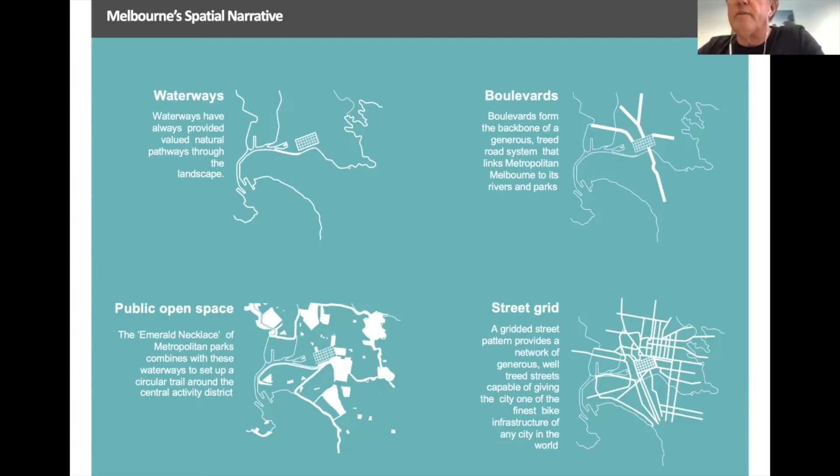So what I want to take you through is the elements that make good cities. If you're going to build on the characteristics of a city, there are five things you possibly need to do, and then methods to do that through public participation, integrated action, adaptability. If you're successful in doing these things, what you'll get is a city that's economically vital, socially cohesive, and sustainable.

So many of the things we've done, I refer back to these characteristics. I'll walk you through quickly how those characteristics were looked at in Melbourne and how we enhanced them. So the next one we'll talk about is local character.

The local character of Melbourne is made up in many ways - it's made up of the materials we use, the character we put into it, the street furniture, and things like the lanes and arcades.

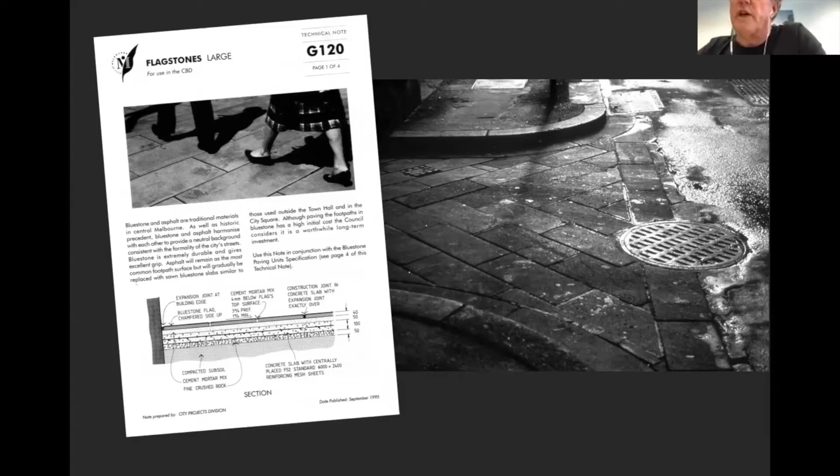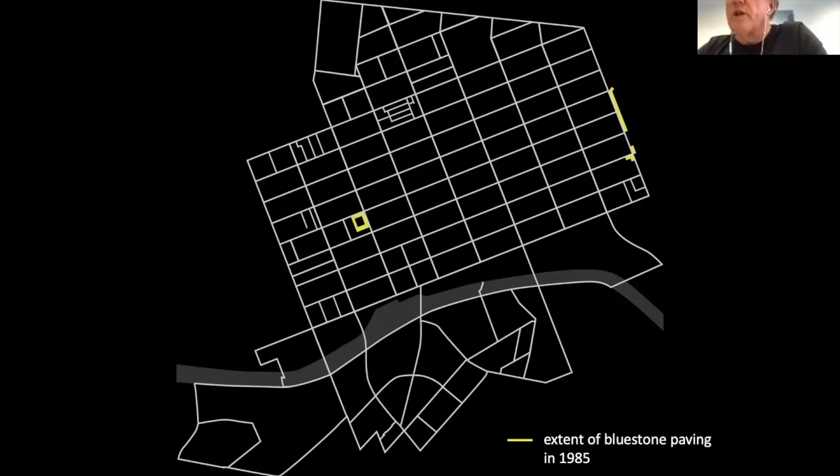What you can see coming up next is how much bluestone there was in central Melbourne in 1985 - up by Parliament, a bit around Treasury, and down the bottom by a building that had put in some bluestone paving. There was actually one other piece not on this plan, in the city square.

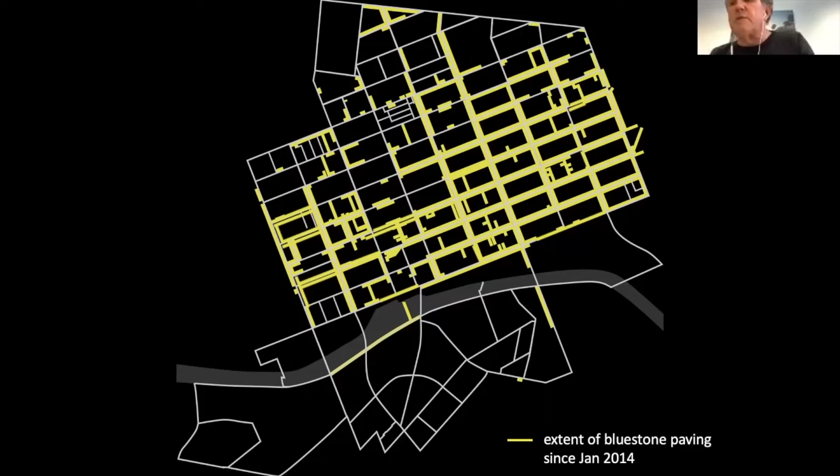What we did is, as every development went through, we required that they pave the footpaths in bluestone. You can see by 2014 most of the city was paved in bluestone, and that program continues today. If anyone was in Spring Street in the last few weeks, you'd have seen them paving footpaths that hadn't been finished. That has now become Melbourne's material - that's part of our local character, part of the way we get an identity.

What that gave us is an excellent walking surface on which we could put things like sidewalk cafes and public art - a surface that was easy to change, but then you could put things on top.

The second characteristic came out of the built form of Melbourne. When Melbourne was set up, the blocks were 200 meters by 200 meters. Hoddle came through and put 10-meter streets through, dividing the 200 by 200 meters into 100 by 200 meters. These are big blocks - if you came in the middle, you'd have to walk 100 meters one way or 100 meters the other.

So what happened in the 19th century was that people used to subdivide to make money. In subdividing, they took some of those big blocks and divided them into a number of smaller blocks, and to gain access into those blocks they created lanes and arcades.

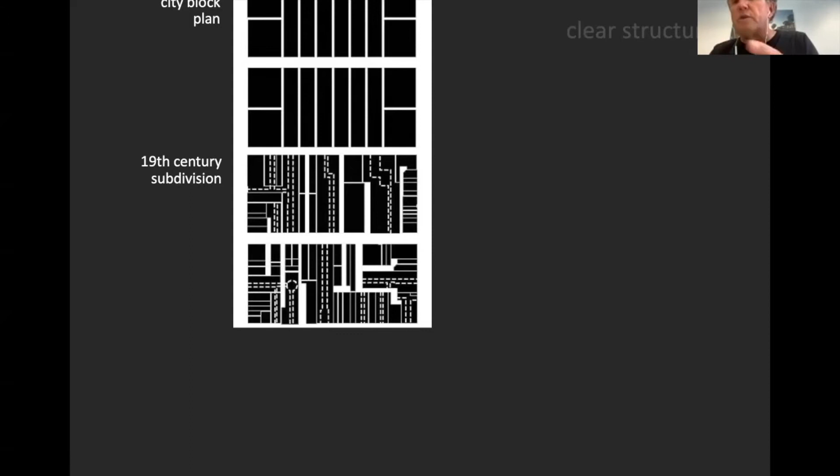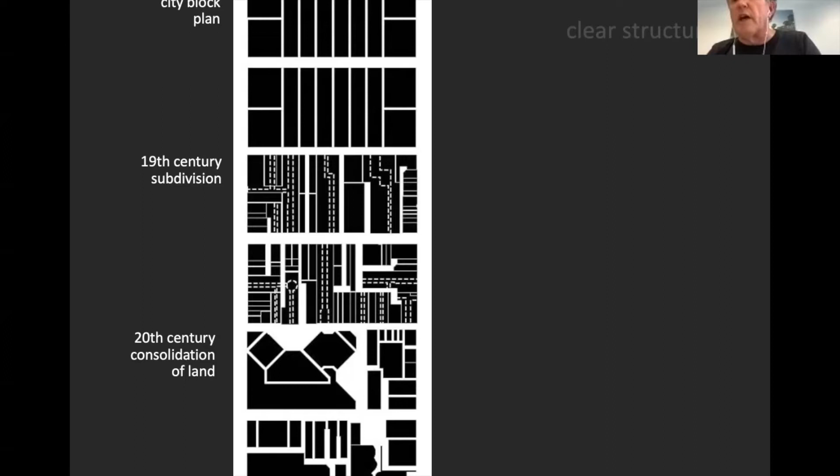You could see streets like the one on top were being turned into streets like the one in the middle - that middle one is the back of Collins Place as it was in 1985. The bottom slide is as it is today. We worked with them and slowly convinced them to externalize and put the energy back in the street. So the lanes and arcades were a very important characteristic in Melbourne.

What happened is we worked on a program to slowly turn those lanes and arcades and small streets into pedestrian areas rather than vehicle areas. This was not a difficult program. All we had to say to people was, we want to encourage you to trade onto the streets. So we gave them permits to trade onto the streets, and we started to eliminate the cars from those streets during certain hours, and sometimes completely. That's become what people now talk about as Melbourne's laneway culture, and it was built on something that already existed.

Sydney have often come to us and said, we'd love to have a laneway culture, how do we do it? And the answer is, well, you haven't got any laneways of significance, so that's going to be difficult. So cities need to build on their own character, not that of other cities.

The other important thing was density and mixed use. We knew back in 1985 that the central city was called the Central Business District, and that's what it pretty much was. People came there, worked, and then left. There was some entertainment, but if you came on a Saturday afternoon, it was deserted. So we said we need to get a residential population back, increase the density downtown, and make it into a mixed-use city.

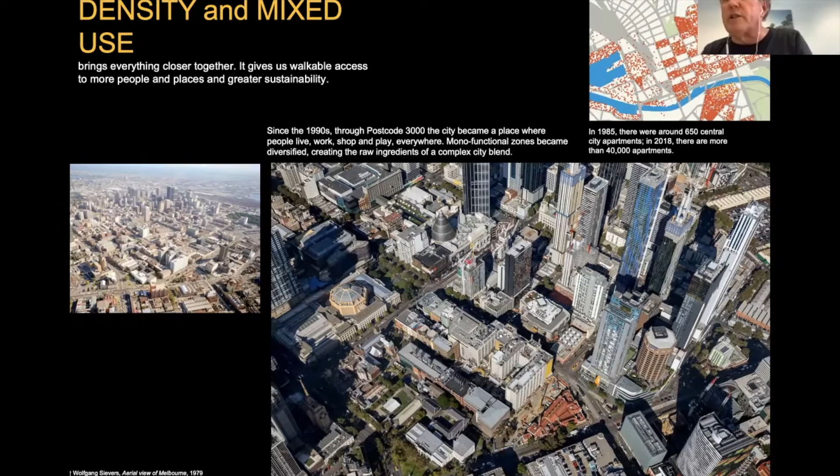The program we put in place was called Postcode 3000. We wrote it into the '85 strategy plan. We said we need 8,000 dwellings in 15 years to come into the city, and we weren't sure how we were going to do that. I often say to people, you need to have an aspirational target. You'll work out how to get there once you've convinced yourself the target's right. That was our aspirational target: 8,000 in 15 years.

What happened in the late 1980s is we had a property market crash and they overbuilt the commercial office buildings. People moved out of all the secondary stock into the primary stock, and we had empty office buildings. So we then put in place this Postcode 3000, and that saw a rapid increase in the population.

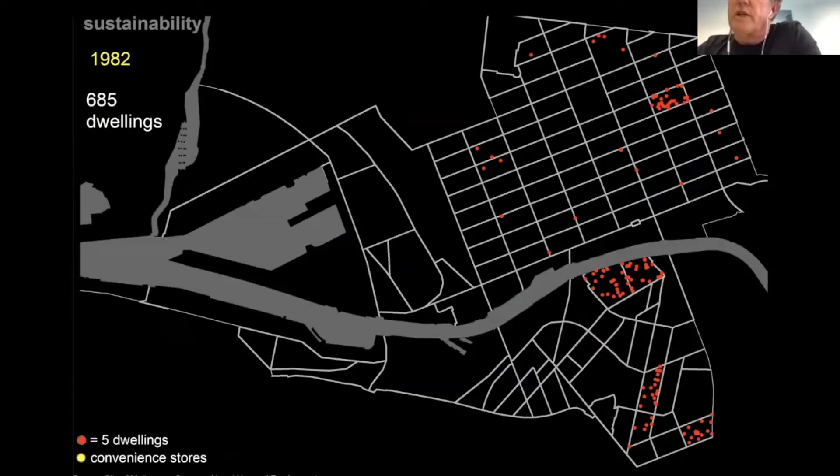Back in 1982 we had 685 dwellings in the central city - each one of those red dots is five dwellings. When the program took off, by 2002 we had 13,000. By 2016 we had 41,000. We've now got over 46,000 residential units in the central city. This completely changed the central city, it made it a mixed-use city.

What happened on the back of that is we got an increase in hospitality and retail. But with a rapid population increase like that, what you got was a need for more open space. A lot of people don't realize that central Melbourne, although we've got this ring of beautiful parks that surround it, was never designed with too many public spaces or small open spaces. In fact it was designed without those - it was thought there'd be collecting points for people, maybe from the mines, that would object, and therefore they were not there. We had five markets, but we didn't have, for instance, a City Square.

So the challenge - and I had parks and gardens in my portfolio for about eight years - when we did an open space strategy, we found that if we wanted to provide the open space for this central city, we would have to spend $700 million on buying land. Now we didn't have 700 million. So what we started in 1985 was a program I call Greener City.

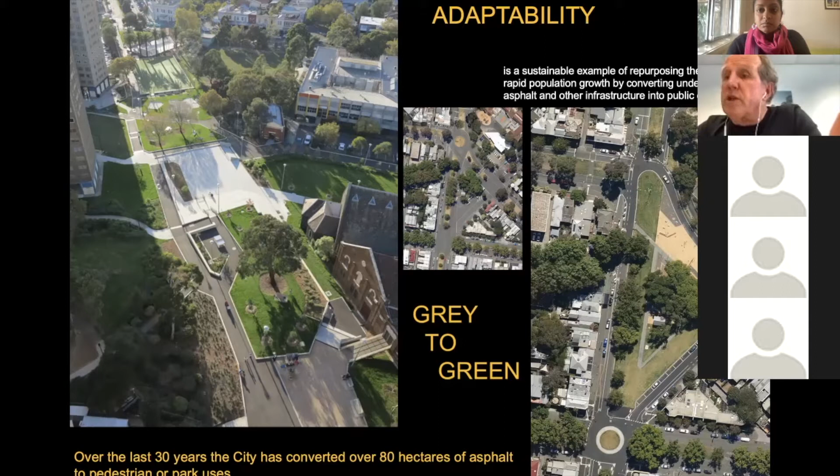This is stealing space away from the car and giving it to pedestrians and open space. You can see on the left-hand slide, at the top, Neill Street as it was, car dominated. We closed that street and designed in this active park that runs through the middle of the high density suburbs there. At the bottom, Errol Street in North Melbourne - the tiny slide in the middle - there was a 500 square meter roundabout. All we did was take away the two-way movement around that, and we took 500 meters and turned it into 5,000 meters. That saved us 14 million in land purchase price, and we created a local park.

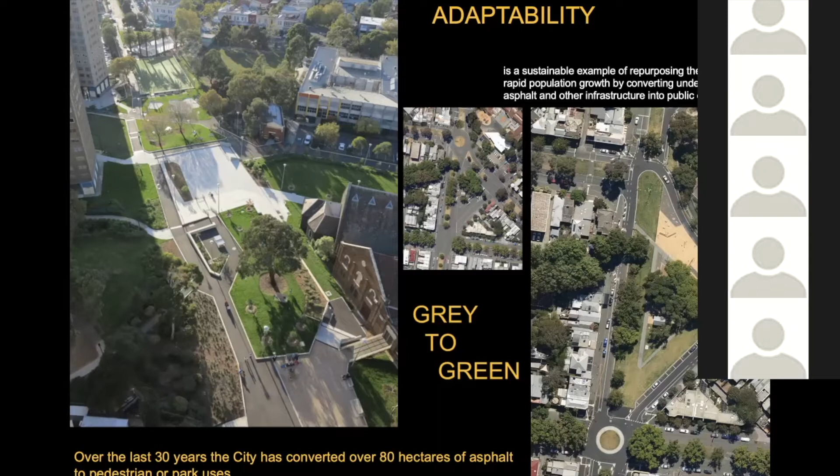Over the 30 years, we've taken 80 hectares of asphalt and other infrastructure out of the central city and turned it into widened footpaths and green space.

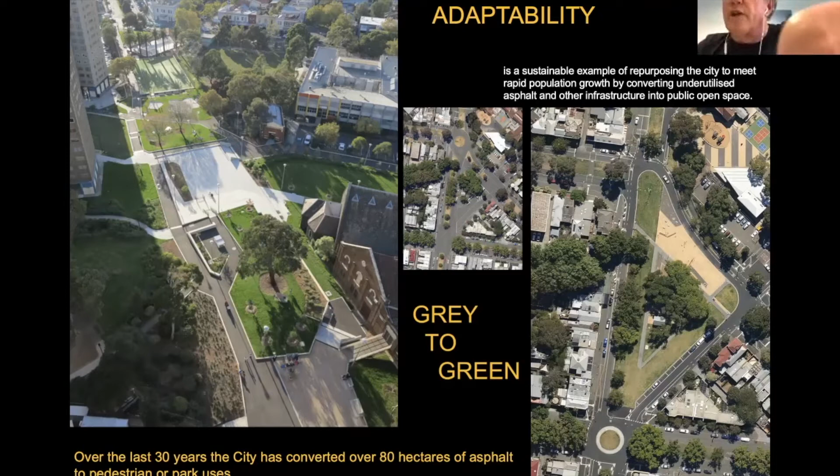What I'm trying to show is we were doing incremental action over a long period of time. The importance of that is if you say to a population, we're going to close all your streets and turn it to open space, there'll be a pushback. But if you slowly widen footpaths and take away roads incrementally over a long period, you get the success we've had in Melbourne, where we've got 80 hectares of new space for people, and a better balance. This isn't about eliminating the car, it's about getting a better balance between the car and the pedestrian.

They fall into many different types of projects, illustrated here, and I won't take you around them, but it includes putting medians down the center of roads, taking out slip lanes, widening footpaths. So there were a number of ways that we gained the space back.

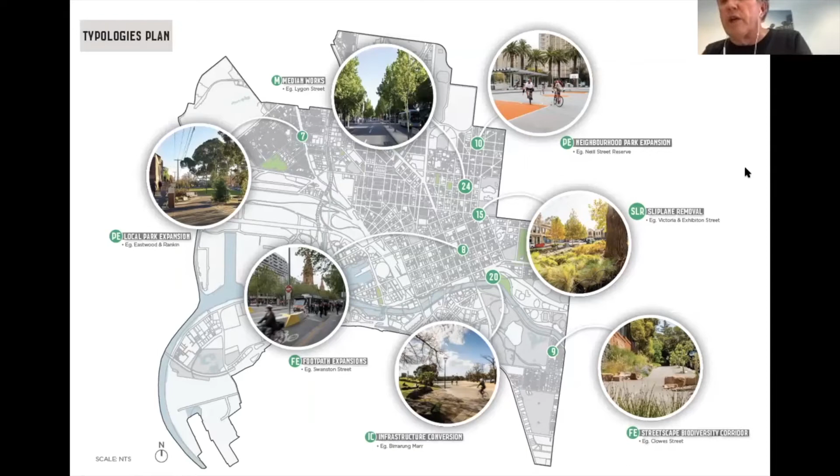The next thing that's important to a city is a high quality public realm. If you ask me what the public realm is, it's all the area outside of any building, the space between buildings. Too often that space is disregarded. You look at many new settlements, buildings are stuck in the middle of the site and the space is leftover rather than designed and programmed. So a high quality public realm is really important, and we started, as with the bluestone paving, to plant trees.

If you take this single phrase away from this talk, I would be pleased: the public space outside of buildings, 80% of that is made up of roads or streets. Therefore, if the street is of high quality, a street you want to walk down, with activity in it, lined by buildings that interact with that street, it's no more difficult than that. I often wonder why we make it so difficult, because we should just start looking at the streets and ask how we'd make the street better. If you do the other things we're talking about, mixed use and density, you'll start to pull a good city together. That was a bit of a mandate I've been working to for the last 38 years.

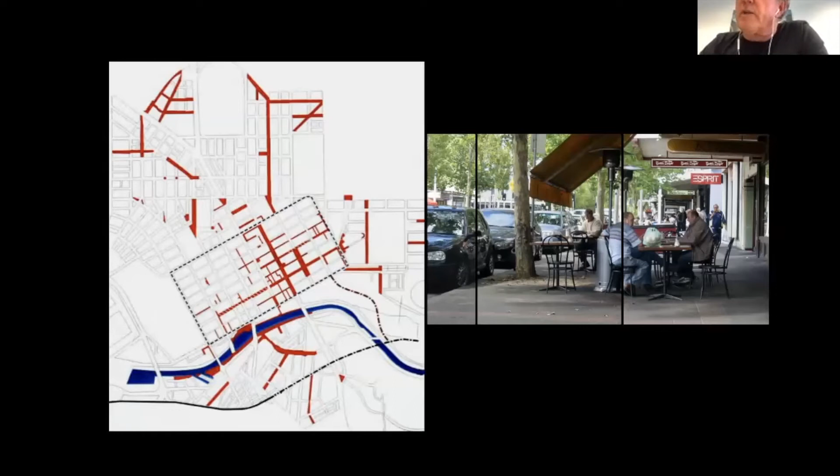We talked about this earlier, decent footpaths that you could walk on. This allowed us to take away some of that footpath and increase it. Lygon Street was one of the first ones we did, where we widened the footpaths and planted trees down the middle, so we got both the side trees and the median trees. If you go down Lygon Street today, it's a treed street with all the activity, now accommodated on the footpath.

It's an interesting street that people like to go to. Some people have become a bit complacent trading there, and it's not always the quality experience you'd want. But it's an interesting experience, and I think it'll be resilient enough to fight back.

And we put medians down the street. So if you go through Carlton and many of those very wide streets, we just dug up the middle, which was the easiest place to dig because there are no services out in the middle. And we just created these medians and planted trees.

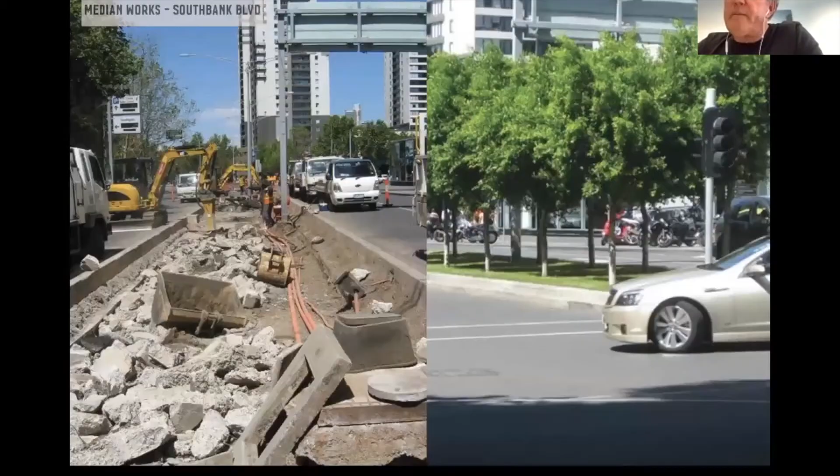And the other distinctive thing that we started to do was to give facilities for people on the streets. So, places to buy a newspaper, or places to sit.

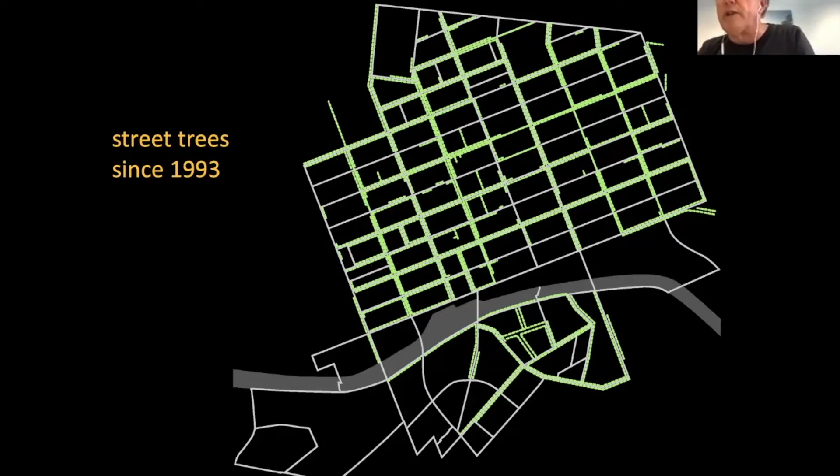It starts to show in the way the city feels. Our projects have become more ambitious. We started Grey to Green by planting 10 trees and widening a footpath by a metre in South Yarra. We're now taking half of South Bank Boulevard, mainly because when the Commonwealth Games came in 2006, we closed the end of South Bank Boulevard at Queensbridge Square, and that dropped the number of cars from 30,000 a day to 15,000 a day. So with half the cars, we said, well, you only need half the area.

We started to put in place a plan to take away half of the area and turn it into a linear park for two reasons: one, to give that space back to the people, but also South Bank has very little open space for local people down there. The orange and green colored pieces here show our projects being done at the moment. The blue is on hold a little because there's a big building going up on the corner, but the orange and green will be finished within about 18 months.

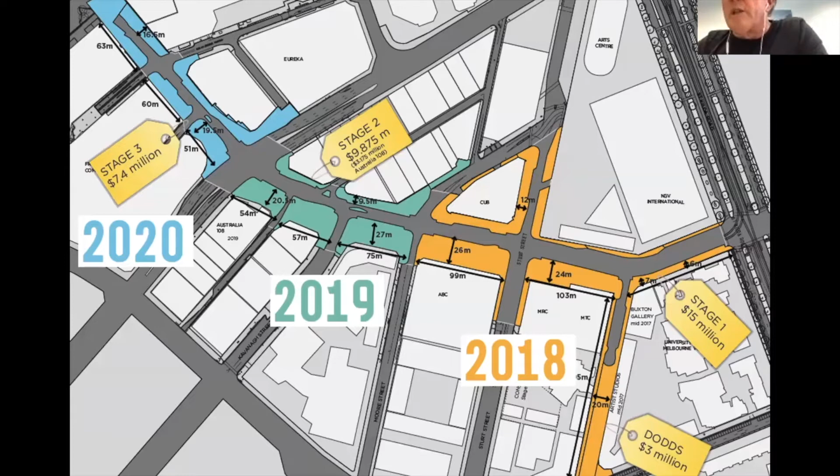Parts of those have been completed already. These are the streets down there - you can see, very wide.

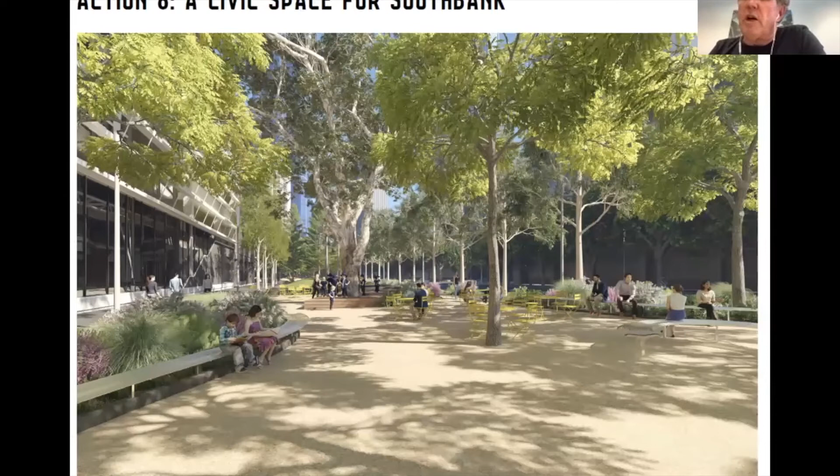What we're proposing in those streets is that they will become linear parks. Each one of those pieces of linear park is about the size of the city square, so they're not inconsiderable in their size.

This is the piece we finished outside the Melbourne Theatre Company. This is more hard paved because we had the cafes and restaurants there. And as we go down the street, it becomes greener.

We even planted in the middle of the tram line so that we could get water penetration down into the earth. One of the biggest problems, and I'll come to it in a second, is water. Water is the new gold in Australia.

Here you can see the impact of planting trees. Swanston Street was closed in 1992 - 29 years ago. At the time, people worried about a view down the middle of the street. Well, the trees are almost joining in the middle of that street now. But it's completely changed this feeling of Melbourne as a green city.

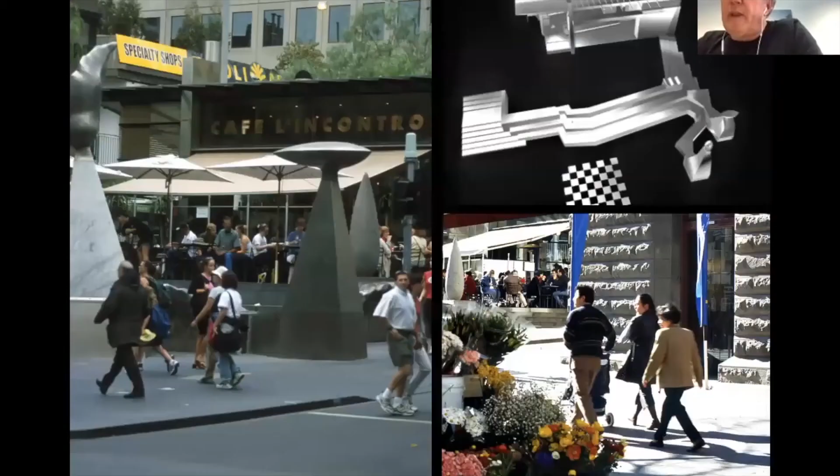Many of our actions are small. This shows a lot of what we've done. On the bottom left, right hand, we cut a hole in the town hall that used to be a window, and we created an information centre. We paved the streets in bluestone, widened the footpaths, put a flower seller on the corner, and then designed this little cafe that's elevated from the street. We turned something that was a very ordinary space - it used to have open space but nothing in it and nowhere to buy coffee, just pigeons - into a place where we think people like to stay.

So we've gone around the city and looked at opportunities. This was a traffic island at the top of Little Bourke Street. We celebrated our Chinese community and the fact that they were some of the first post-colonial settlers of Melbourne. This is a celebration, turning a traffic island into a meeting place and a place to sit.

We took the city square, which had been designed and won some architectural awards. It was opened by the Queen, but it failed. It failed because public spaces only succeed if you have activities around the edges. If you think of any good public space that you'd like to go to, it'll usually be what happens around the edges that makes it an exciting space.

Quite often the space itself is very simple - it might just be paved, it might just have a fountain in the middle. So this is not about putting stuff into space, this is about putting activity around space. So we took the city square, went to the bottom of the water wall, and sold off the back part.

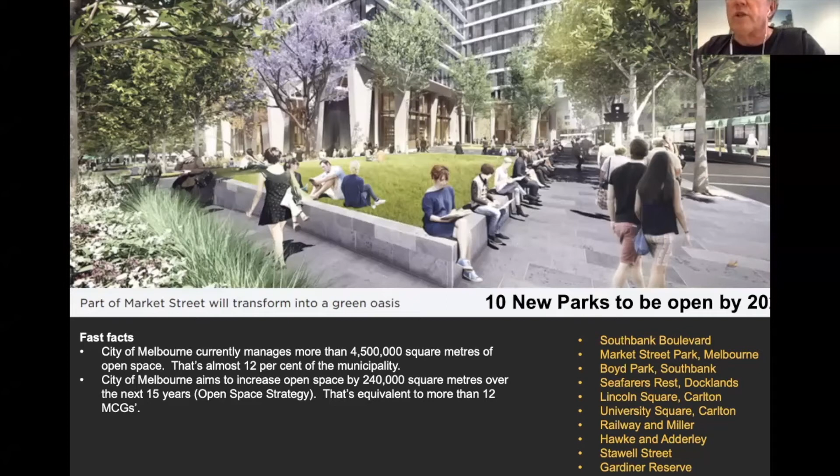So we've talked about a high quality public realm and what achieves that. The next is connectivity. If you want a city to work, you need to be able to walk through it, ride through it, drive through it, and use public transport. And it needs to be convenient, with no barriers.

So we went on a program of trying to get the best public transport system we can get. It's not a responsibility of ours, it's a state government responsibility. But we were certainly responsible for the pedestrians and the bikes, and so we started to give them more space.

Swanston Street, when we closed it, which was an action we put in the 85 strategy plan, we closed it in '92. It was the main street through Melbourne, used to take 60,000 cars a day, but it was a terrible street. A lot of people talk about it romantically as though it was a great street, but...

The street on the left is Swanston Street. It had narrow footpaths, they were asphalted, there were cars down the whole lot. Many of the properties were, in fact, vacant and up for lease. So the retail core of Melbourne was dying.

By widening the footpaths, planting trees and putting sculpture in, we managed to get people back. And I think a lot of the traders at the time didn't believe us.

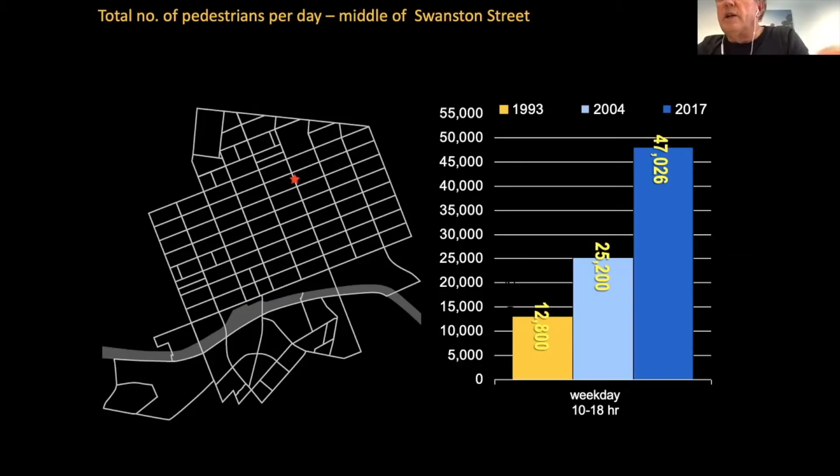Well, not today, but just pre-COVID, we had 47,000 people walking and using Swanston Street. It had become one of the busiest streets in Melbourne. In fact, we were starting to remove some of the things we'd put in earlier to provide amenity on the street. And what we did also is provide good facilities for public transport, so you could get onto public transport with some dignity rather than standing in the road and being sprayed by a car that might be passing you.

And here's the street. This is obviously pre-COVID and pre the start of Metro, because the City Square, as you know, is now dug up and is going to come back post-Metro. But the street is a vibrant place and a central pedestrian artery for our city.

The other thing, as I mentioned, I had responsibility for parks and gardens, and it happened to be around about the turn of the century. What was happening is we had the Millennium Drought, and I'm going to talk to you a little bit about what that meant.

But first of all, what we wanted to do back in 1985 was to extend the open space. In this slide, in the middle, just as the river turns at the top there, you can see two big tower buildings. They were the gas and fuel buildings, and they sat where Federation Square is today, in front of the cathedral. And we aspirationally did a drawing.

The drawing we did, you can see from 1986, showed this is what we'd like to be, where we'd like to be in 2000. We'd like to extend the park on the east of the city right the way around, uninterrupted by the rail lines. So people would get this feeling from Carlton Gardens right down to the bay through Albert Park and Fawkner Park - you get this linear green wedge.

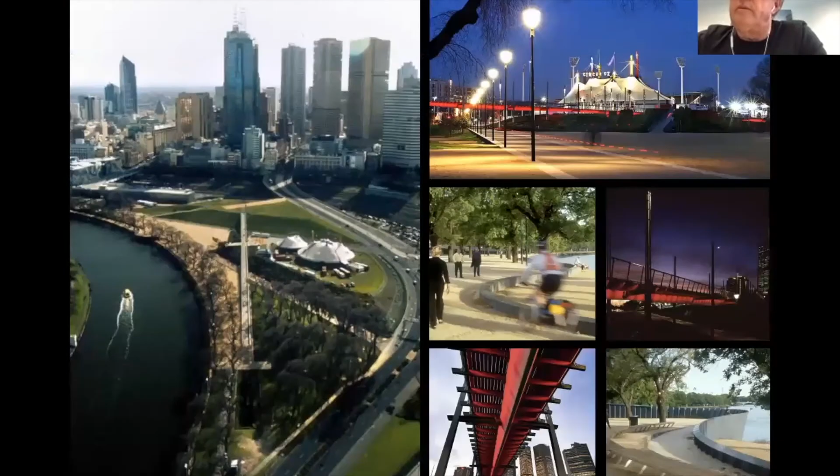With Federation Square, which we partnered with the state government, we went to the Premier of the day, Jeff Kennett, and said: on the back of Fed Square there are 12 running lanes that run through the station, and there were 56 lines there - the others were where they stored trains at night. We said, you remove the trains and put them at the end of the line where you can store them, and we will design and build a park. And to his great credit, he said yes, and that's what he did.

And we designed and built Birrarung Marr. That started to go towards this vision of bringing the parks right around that eastern edge of the city. This was a park designed to take events, because many of the events were happening in our green parks, and they were suffering as a result.

I just showed this because in that park, if you stop and walk through carefully, you'll find a lot of references to the First Nations and Aboriginal people. In fact, this is an eel, and there are two eels that intertwine over the path that goes through that. This was made and cast over a fairly laborious process where we worked with a number of Aboriginal artists to do this project.

One of the things we were realizing at the turn of the century was, although we were getting these horrific fires - 173 people died in 2009 in the bushfires - more people were dying just because of heat. You can see 374 died in the same year just from the heat wave. We started to realize with climate change that heat was going to be a problem, particularly in the central city. The heat island effect of a city is considerable.

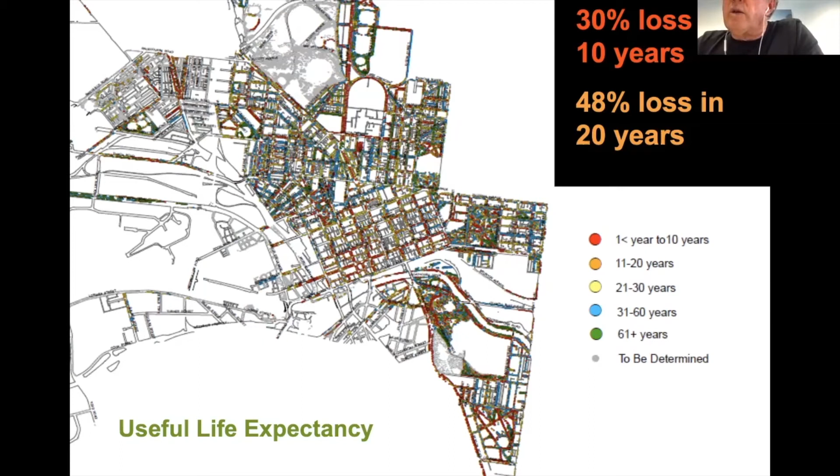And so we put in place an urban forest strategy, and we also had an open space strategy, which I've spoken to you a bit about. The urban forest strategy was about how do we increase the canopy cover of the city.

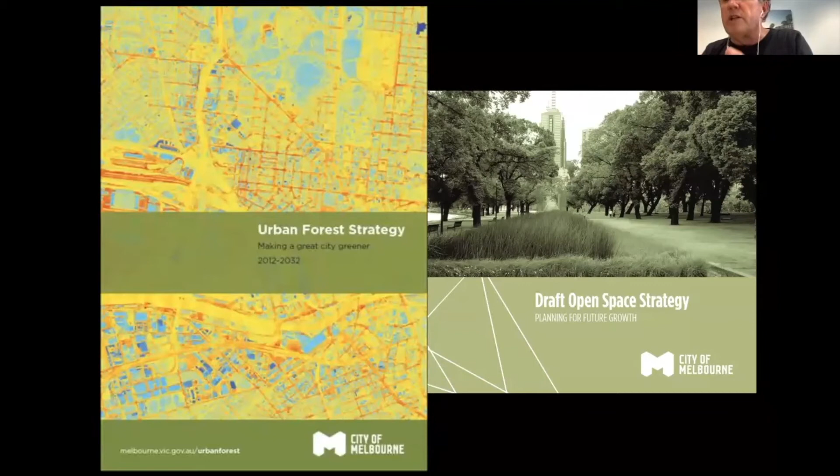We started this strategy because of a problem. If you look at this, taken at midnight, the streets are hot. Wherever there's asphalt, it's hot. You can see the gardens are blue and yellow, which is much better. Some of those big blue spots happen to be air-conditioned sheds, which is not a good idea. But we realized that if you plant trees, you can actually lower the temperature by 4 degrees centigrade.

So we started to look at where we can plant trees and what trees we want to plant, and put in place this urban forest strategy. I said to my team, I don't want you talking about types of trees, because we get into an argument about indigenous versus exotic and all the rest of it. That's not a healthy argument.

What I want people to think about is how much canopy cover do we need. We need to go from 22% to 40%. We need diversity of species, because we're not sure what pests will come or what trees will survive in the heat. We need to improve the health of our vegetation, and we need soil moisture. So those were the six strategies we put in place, and they were adopted, because everybody agreed more trees would be better.

So we got the strategy through, and then we could start talking to people about what sort of trees and where to plant. We used a process here, I think with people from RMIT, where we created this app called the Urban Forest. If you look up Urban Forest Melbourne on your phone or iPad, you can get every tree planted in Melbourne.

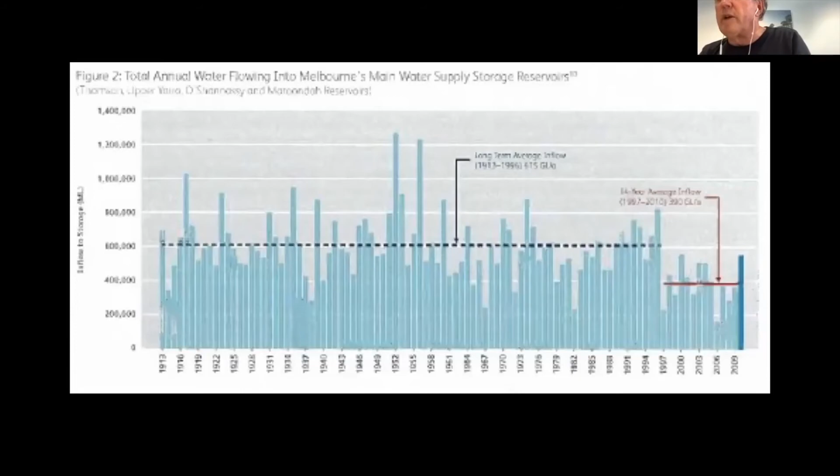There were other very simple things too. The drainage pits on the street, we took into a tree pit, and the tree was set below ground. So the water came into the tree pit, gave the tree a good water, got down into the soil, and if there was too much water, of course, it would get into the pipe. But we wanted it to get into the pipe last. We wanted it to get into the soil first and around the trees. So we started to put our trees in these pits so that the water goes into the tree pits.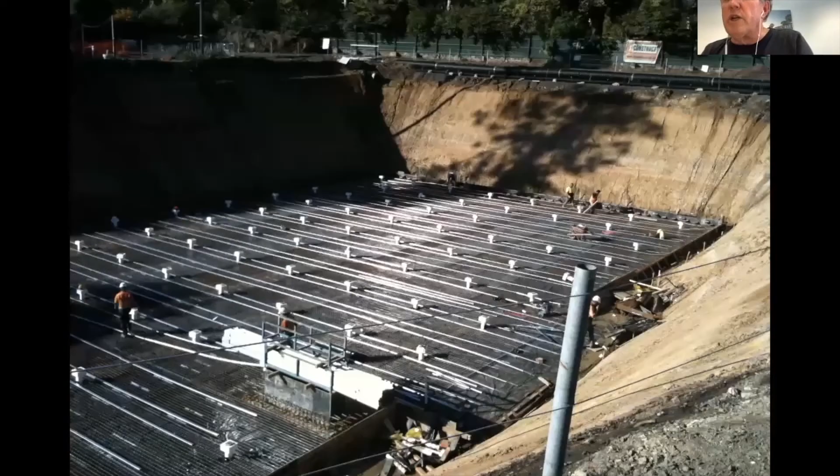And this was the tank in Fitzroy Gardens. So I was lucky when I had parks and gardens. If you went into Fitzroy Gardens, which is one of our most historic parks, and said you were going to dig a big tank, you wouldn't get very far. So what we did, and it was a big tank - you can see the people in here, very small at the back there - it was 5 million litres.

So in this single project, we looked after the tourist industry, we collected water and slowed down the flooding, we reused the water in the park, but we got an extra 4,000 square meters of open space. And that was what made us able to sell it. We got money from both the feds and the state by just having a project we said would be beneficial to the majority of the people in Melbourne.

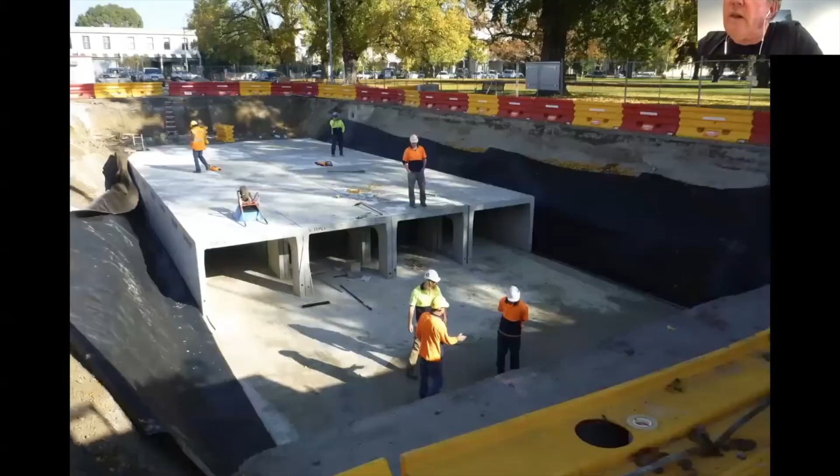We also put water tanks under streets. So this is Darling Street in East Melbourne. We built tanks under the road, and then we built rain gardens in the medians in the middle of the road, as you can see here. So we collected the water as it came down the hill, purified it, put it in the tanks, and then used it back in the gardens.

And this was a process that was very successful in keeping gardens. With COVID, we looked at this, and really, with COVID, we need to respond, recover, and then move forward - regenerate. And so we had a series of projects that try to build on what we're already doing.

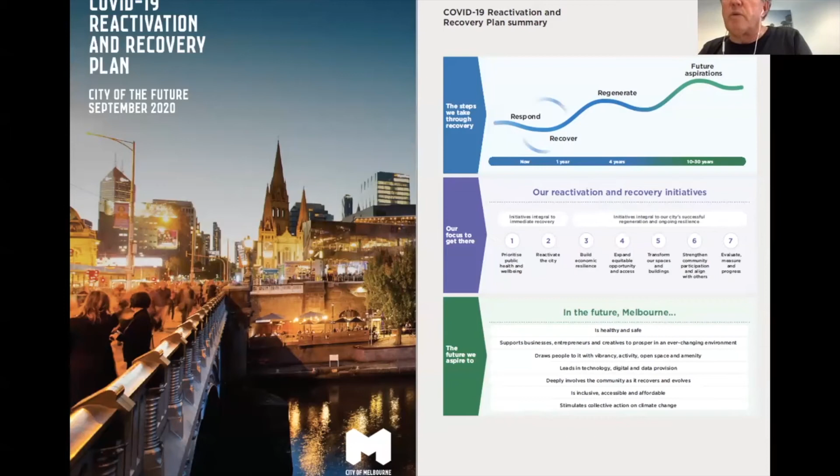I won't run through them all, but there were 40 kilometers of new bike lanes going, and you would have seen them. There was support for cafes and restaurants, support for businesses, and support for university students, where we gave them money to spend on food at Queen Victoria Market. There was a whole program response to try and keep people able to get through COVID, but also still use the city.

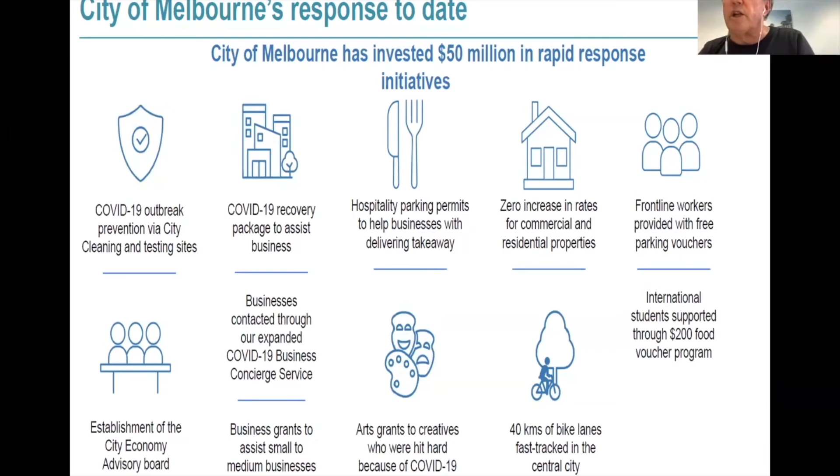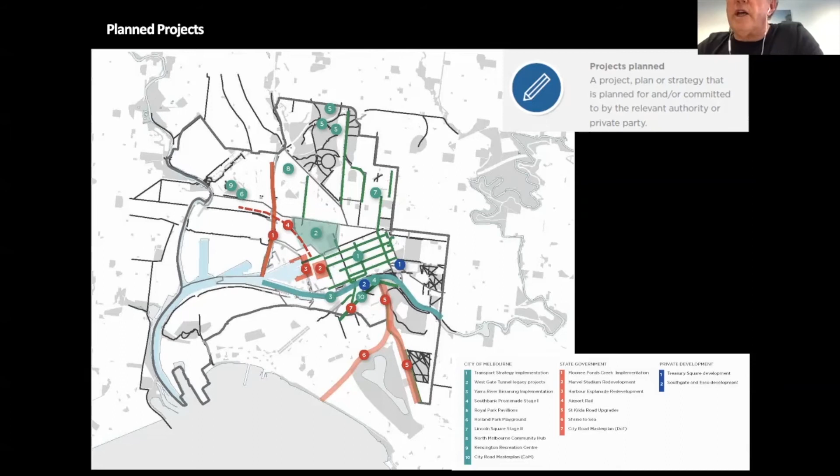This is a map that shows the projects we had, and I won't go through all of it, but the green lines are the bike paths - you'll see the bike path going up Exhibition Street at the moment. And then there was art that we're putting into the street at the moment, and a whole lot of other programs. When you get these slides, you'll be able to look at those more closely.

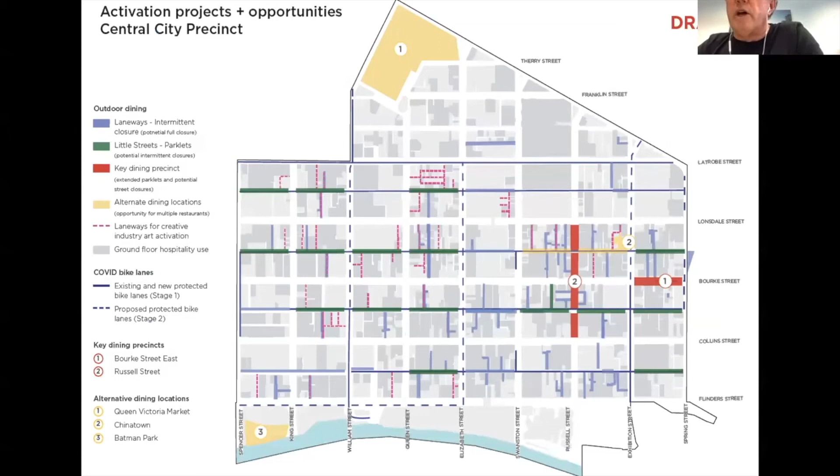And we allowed people to widen the footpath. This was up at the top of Bourke Street. What they did is they took away the car parking space, and we allowed them to expand the footpath and use it. That meant they could actually keep a decent number of customers and support them from their kitchen, while they were going through that difficult period where people weren't allowed inside restaurants.

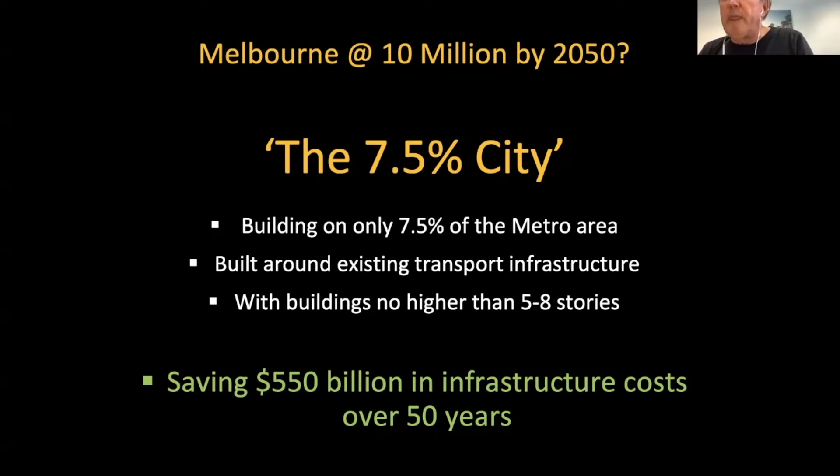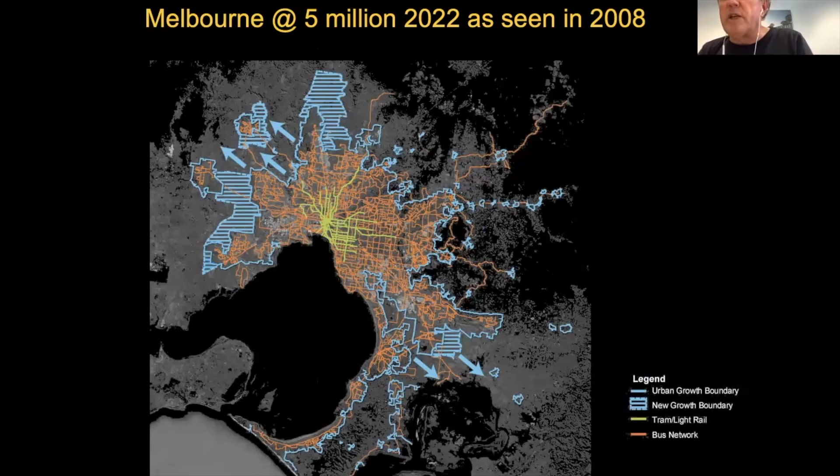What happens at the moment is whenever there's a need for more housing, the government puts it on the fringe, and all those blue hatched areas were areas that were taken and converted into greenfield sites. The problem with that is if you put people far out, they are disadvantaged.

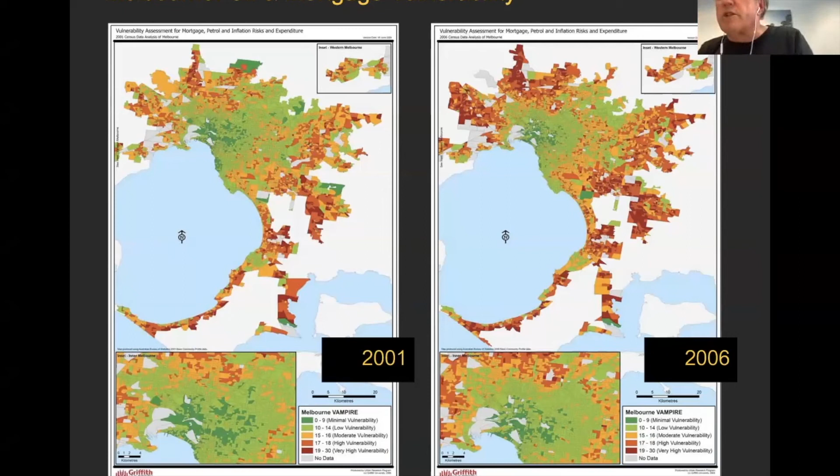And what you saw was some of the symptoms. The city was less walkable. You got family violence, something we talk about. The government's putting more money into family violence, but at the same time saying let's expand the city. Where is that family violence predominant? On those fringes. It's not totally the only reason, but you can understand if people have the stress of extra costs for owning 2 cars and having to drive every time they wanted to get somewhere, that could lead to frustration that results in things like family violence.

There's also a problem with obesity - if you're sitting in a car for an hour and a half getting to work and back, you might be snacking and not walking. RMIT have done a study showing you're more likely to have a heart attack if you live in the suburbs than if you live in the central city. Why? Because in the central city you walk more - possibly 41 minutes a day, whereas in the suburbs you might only be walking 7 minutes a day as part of your commute.

So what we looked at is, what if you put your population in and around the existing activity centres, where there's a railway station? This is Box Hill. We went around the city, and 3% of the metro area is made up of activity centres. We found you could put 860,000 people there, and there are a lot of activity centres, as you can see from this diagram.

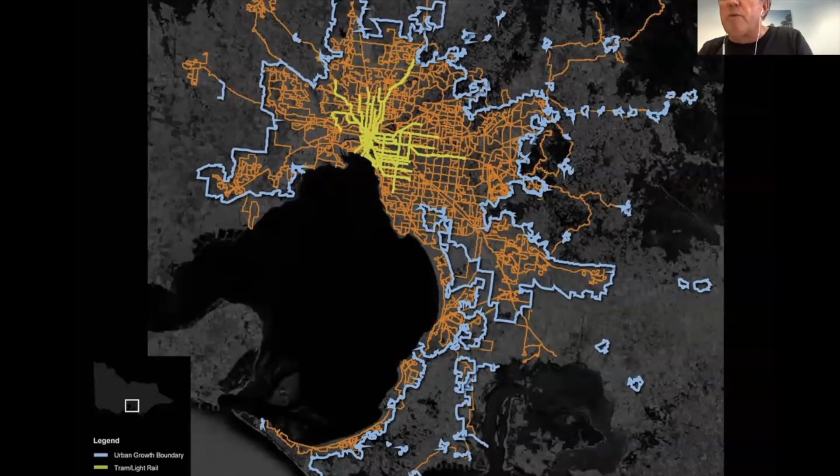What we saw is you had a fantastic tram system and this gridded road system with buses on it. In fact, it was the ideal system for a good public transport network that could connect with railway stations and take people not only into the city, but around it.

And with new technology, this is the Trackless Tram, which is emerging now from China. It looks like a tram and carries the same capacity. It's got no overhead wires and no tracks. It's guided along white lines by a computer, and it's got batteries, so it's electric and you don't need the overhead wires.

It comes at one tenth of the cost of light rail. So there are systems now which will allow us to expand these systems, and we know that if you build those systems, development comes to those areas.

So we went through a study and looked at every parcel of land, and there were 1.5 million parcels of land.

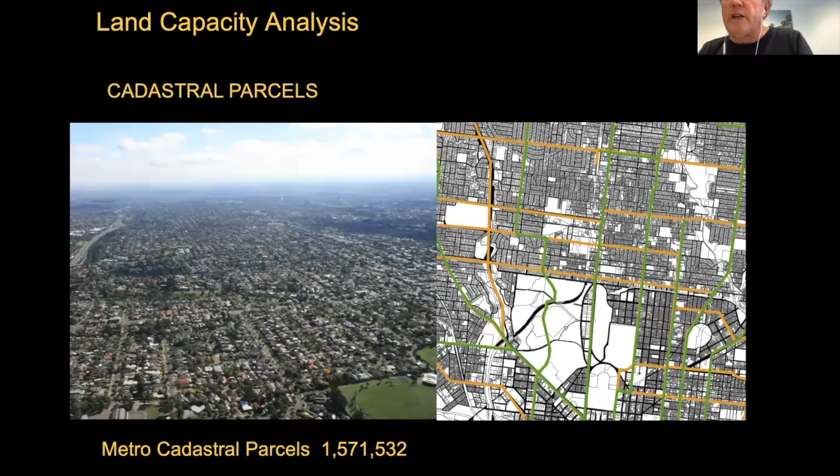We took out all the sensitivities — I haven't shown you that because it would take too long — but we looked at every site and removed things like heritage sites and recently built areas. What we concluded is you can put 2.4 million people along the bus lines and 1 million along the tram line. So you're getting nearly 3.5 million people in that sort of area. There's a reason why you would do that.

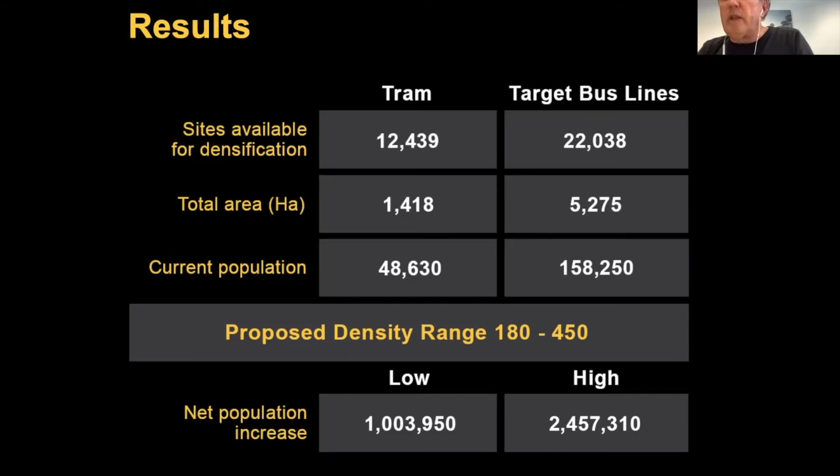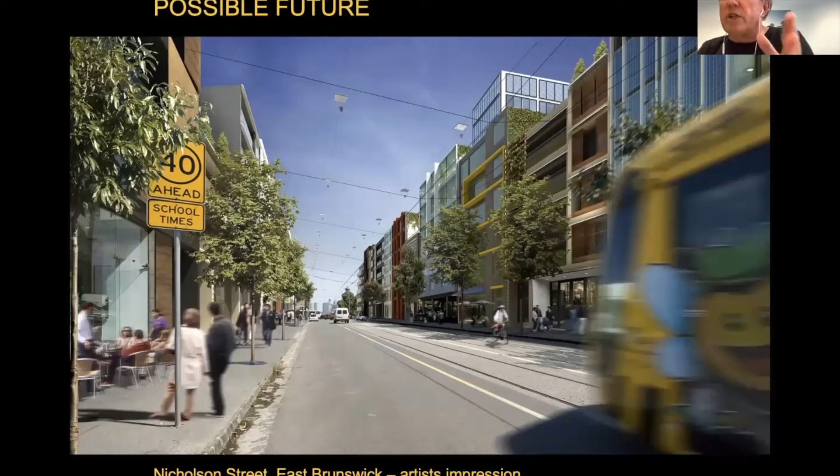This is one of the examples. You can see the city in the far distance. This is Nicholson Street — you can see the expensive infrastructure and the development alongside. So we said, what if you put 5 to 8 stories of development just along the street, not further back, but just along the street.

And this has started to be built, and this is a good example of what you can build. What you're getting here is activities at the ground floor, people living above. That population not only makes the public transport system more viable, but it provides employment and energy within those high streets. So this is the model.

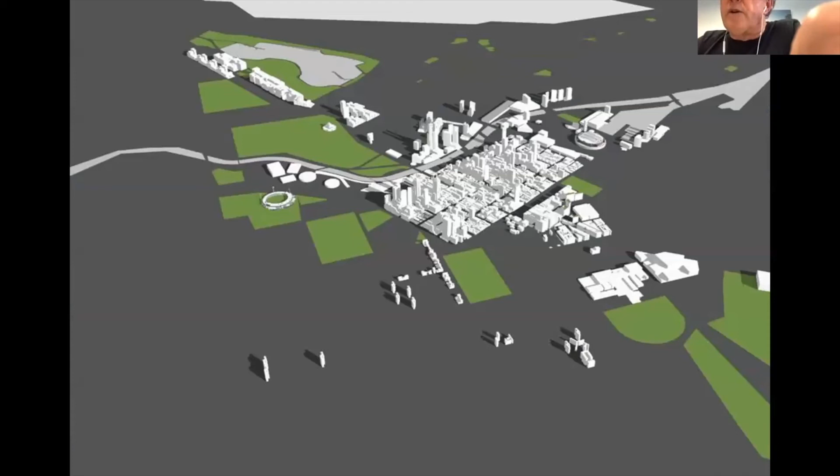If you flick through this — basically along the tram lines, put your development along the tram lines, don't put it in the middle. Leave the suburbs as they are, so you don't have to build in those. And in the suburbs, that's where you plant your trees, collect water, put solar panels on your roof.

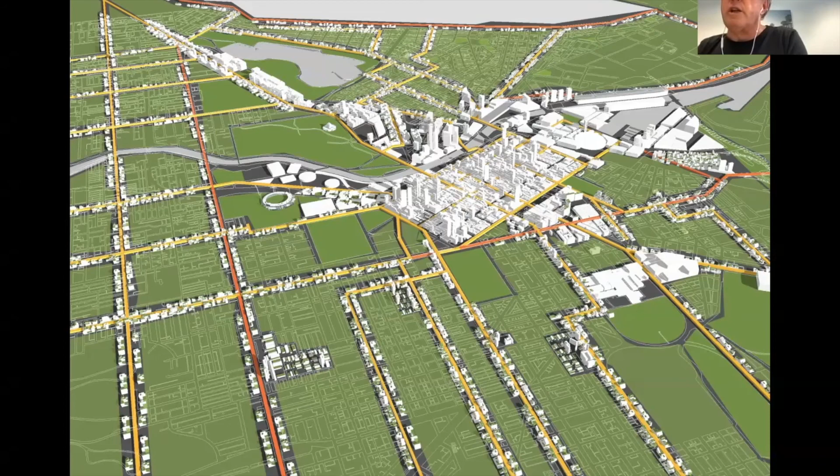And what that gives you is the new green wedge — that's where you can walk out of suburbia to a high street, to a denser population, and live what I think people wanted to do in the suburbs: live in a pleasant environment, but be able to get to the things they need, and make a walkable city.

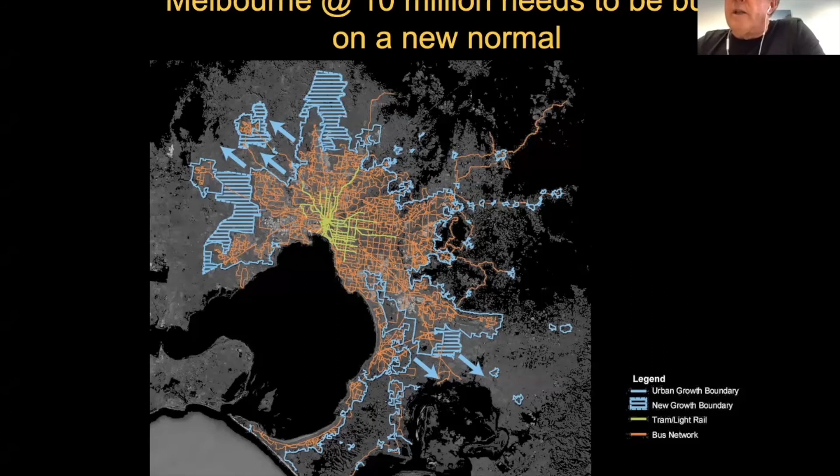As I said, we advocated back in 2010 that you could do this without expanding the city. Unfortunately, the state government is still expanding the city, but not at the greater rate they were previously.

That's the end of the talk. And I know I've gone a bit long. That's interesting.